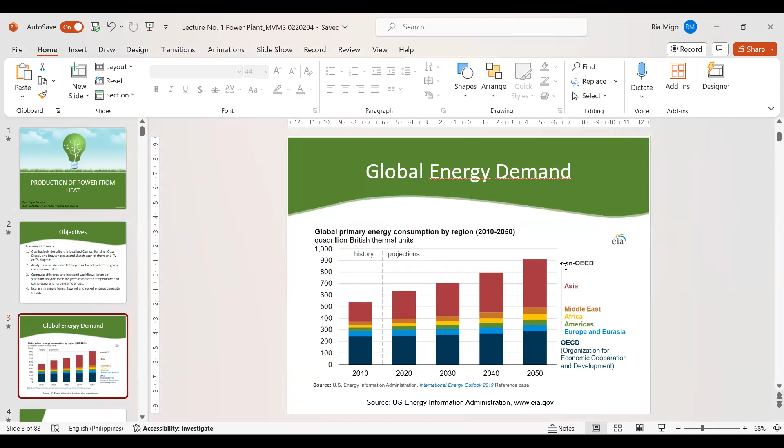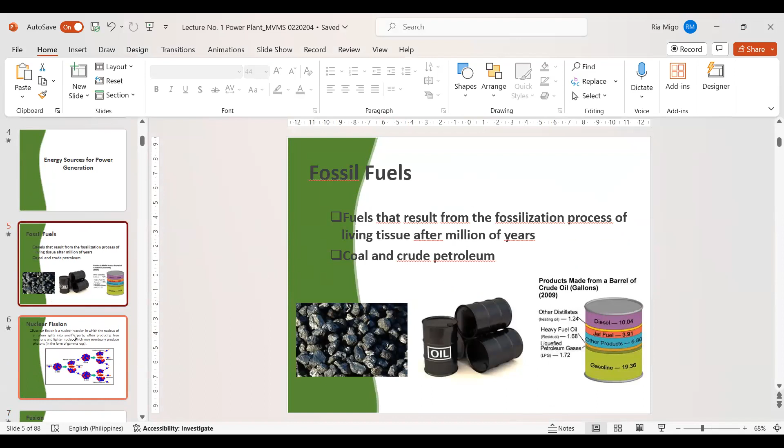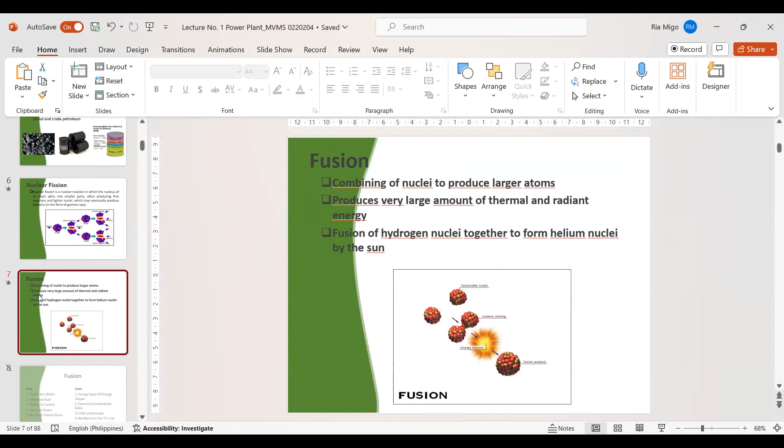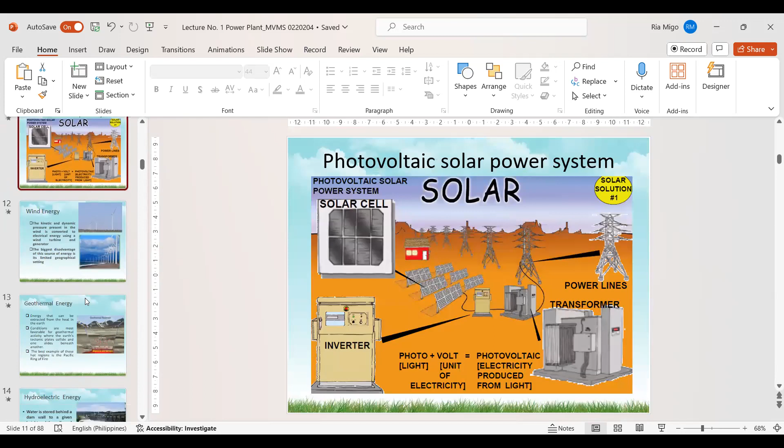Last time, before we started the discussion proper on the production of power from heat, I gave some general information. First, on the global energy demand, that it's increasing, so we need to increase the supply as well. But the problem is the energy source for power generation. We discussed the various energy sources, beginning with fossil fuels, but we know that they are not good because they are the cause of global warming. Then nuclear fusion—there's a big development on this technology, but it still remains expensive. Then we discussed renewable energy sources like solar, wind, geothermal, tidal, and biomass.

For biomass, we discussed that they can be converted to solid, liquid, and gaseous fuels.

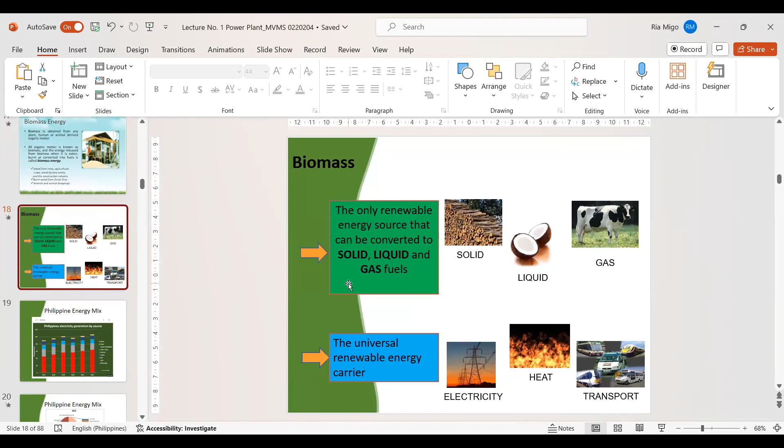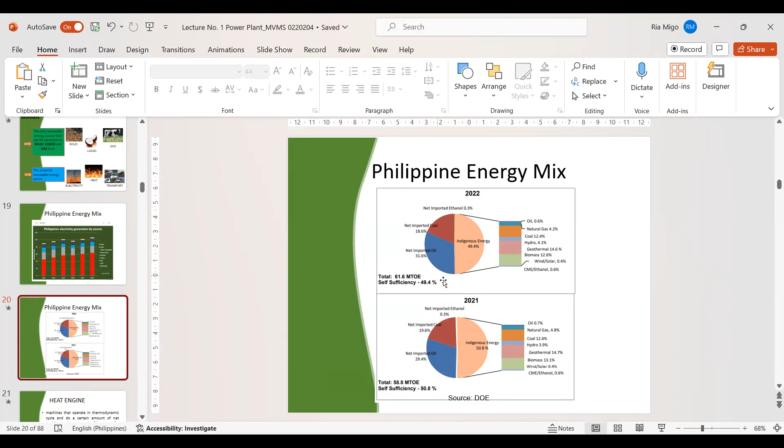We also touched on the Philippine energy mix, and based on the data, we are still very reliant on coal and oil, which are fossil fuels. Also, we are still importing almost 50% of our energy source. The rest we produce ourselves, but we still rely on imported energy source. So that's quite sad. We hope to be self-reliant in the future.

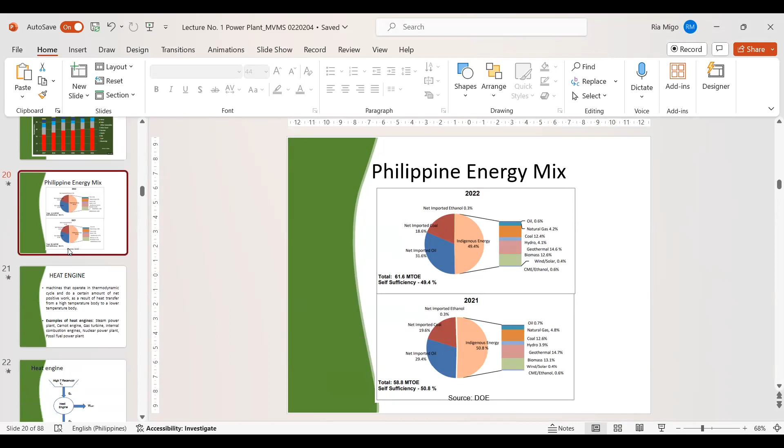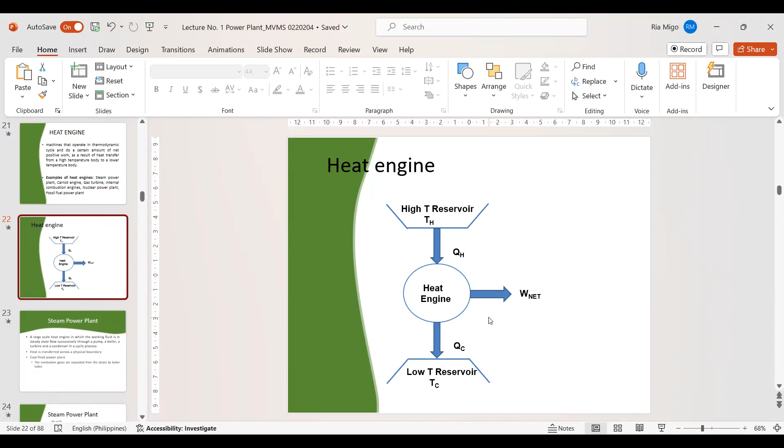Then we started the formal discussion on the heat engine, which is an engine that pumps heat from a high temperature reservoir to a low temperature reservoir, and in the process produces a net amount of work. For the steam power plant, this is a heat engine wherein the working fluid is in steady state flow through these devices in a cyclic process.

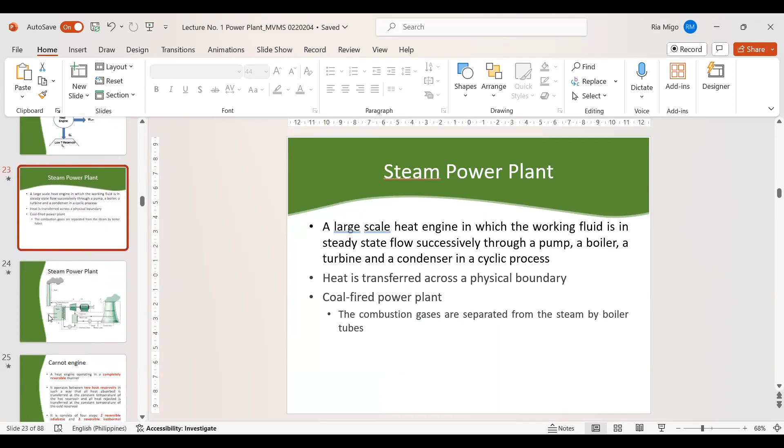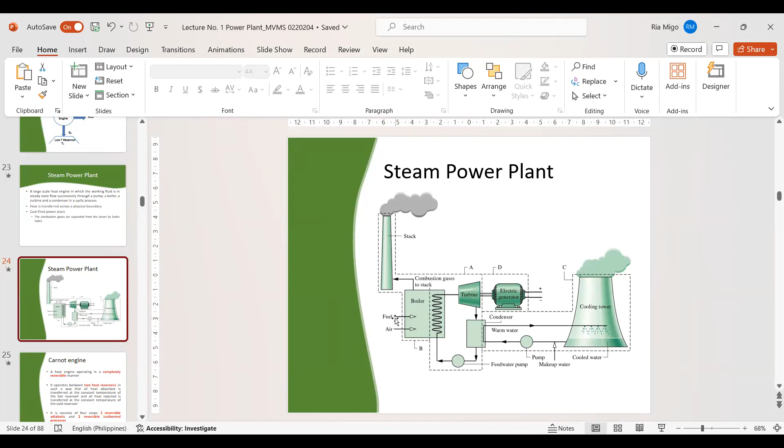So this is a diagram of a steam power plant with the basic components. We said that if we still want to use our power plants having this configuration, but we want it to be sustainable, then we must replace the fuel from fossil fuels to renewable sources of energy in the boiler. So we simply have to retrofit the power plant so that the fuel source is renewable and sustainable.

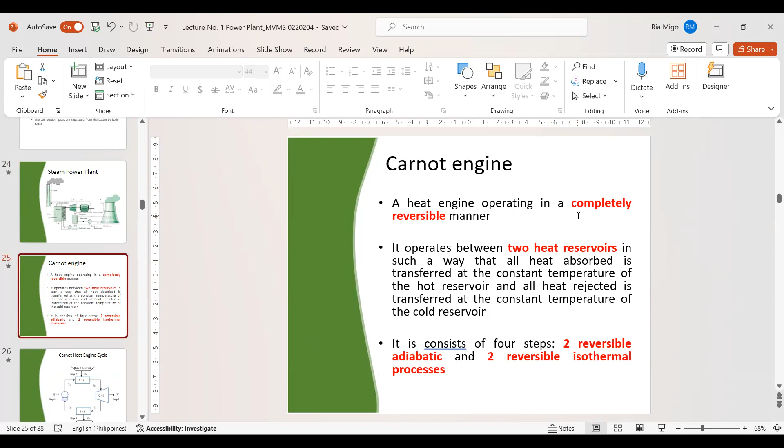Next, we discuss a Carnot engine, which is a heat engine operating in a completely reversible manner. So this is a Carnot engine. On the TS diagram, temperature-entropy diagram, we discuss the Carnot cycle, and as you can see, it's operating inside the saturated curve. All of the steps are reversible.

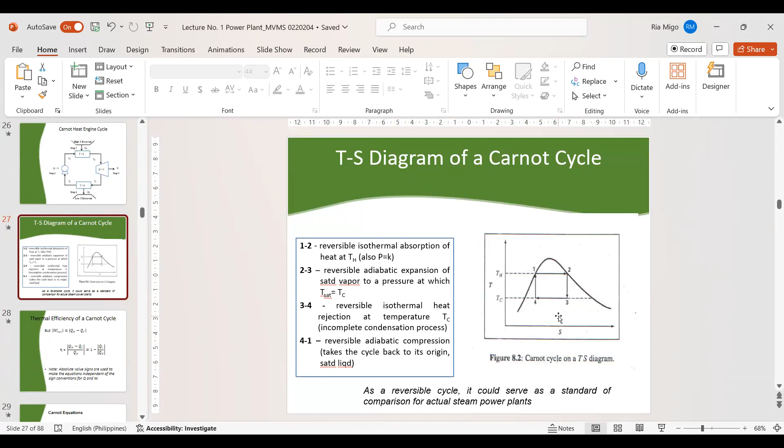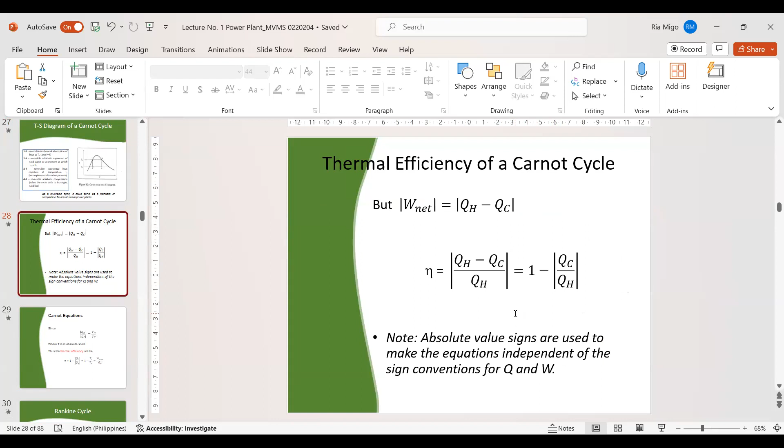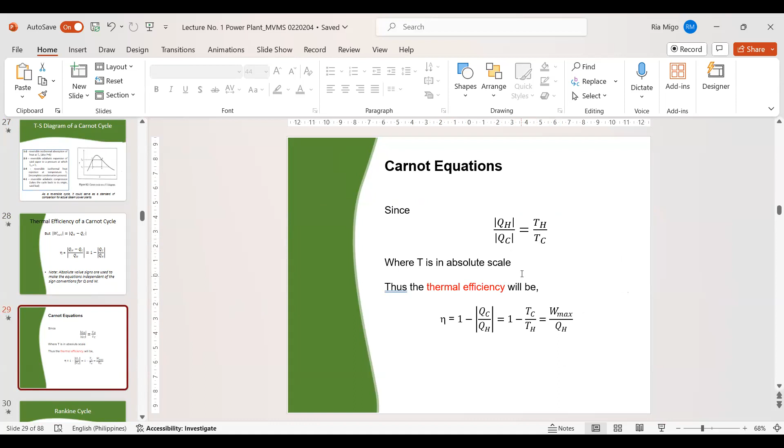So what is the use of a Carnot cycle? When we calculate the efficiency of a Carnot cycle, we can use it as the basis or the ideal efficiency of that engine. Remember, we cannot achieve that ideal efficiency—we can just approach it. It's the highest efficiency for that heat engine operating on that low temperature and high temperature.

So next we discuss the Rankine cycle, which addresses the practical difficulties in a Carnot cycle. For example, the practical difficulties are the severe erosion problems because of the high moisture content in the turbine, as well as the design of a pump that can take a mix of liquid and vapor. So this is a very difficult pump to design. That's why...

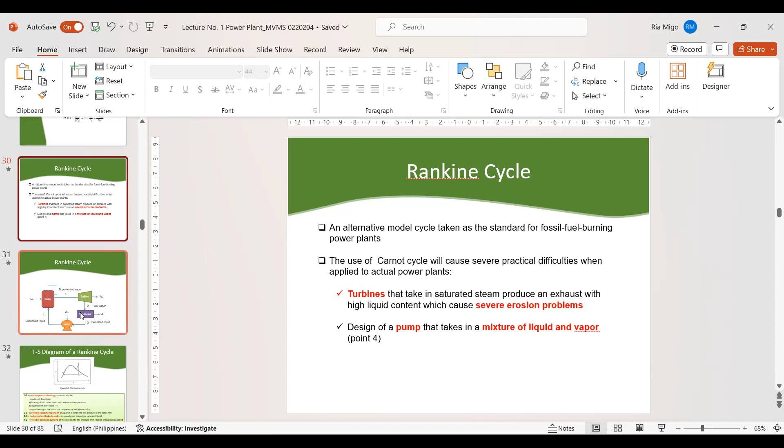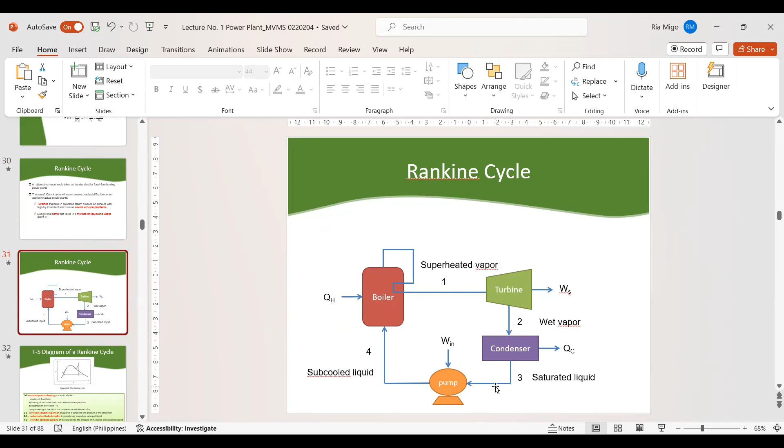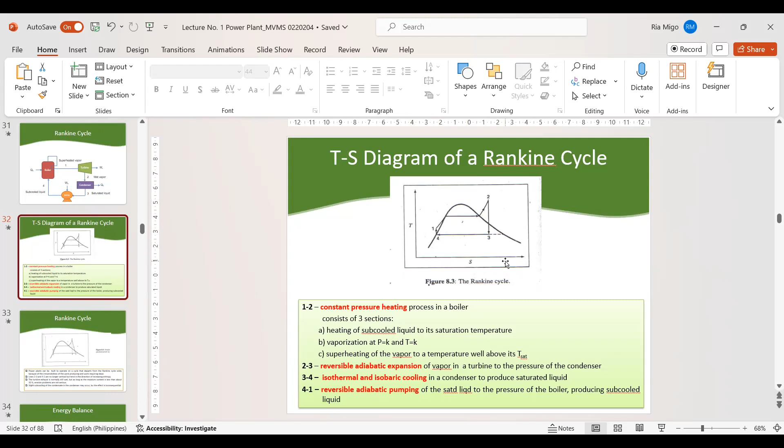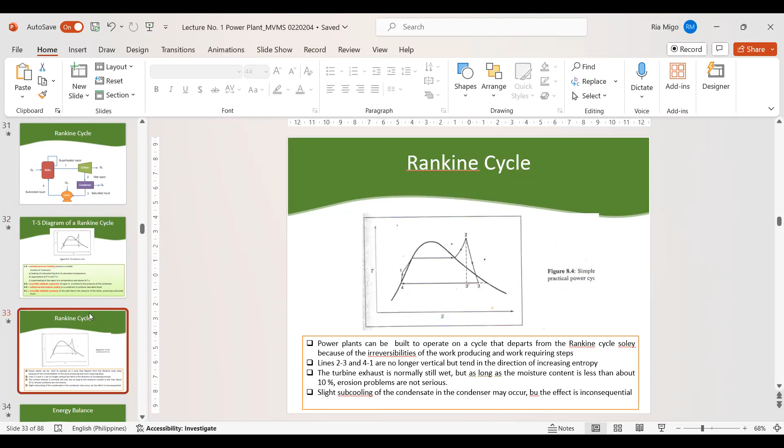In reality, it's not possible, so we are always going to a higher entropy state. That's why these lines are always leaning towards the right, towards higher entropy. It's not a straight vertical line, rather it's slanted to the right. So this is an actual Rankine cycle.

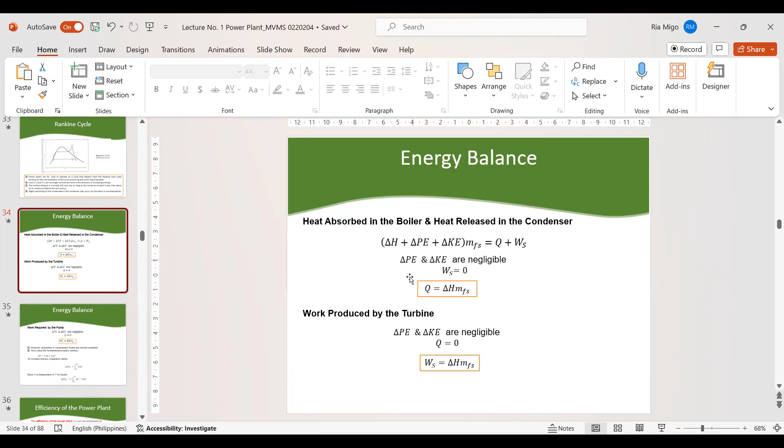Next, we did energy balances for all of the devices in the cycle, for the condenser and for the turbine. These are the energy balances for each device, and of course we have the energy balance for the pump. Then this is the boiler and condenser combined, and then the turbine, then the pump.

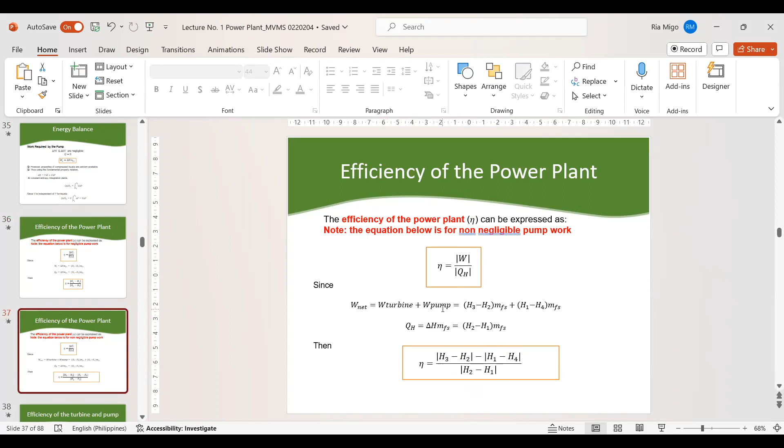Our next discussion is on the efficiency of the entire power plant. First, if there's negligible pump work, the efficiency is the net work produced by the cycle divided by the heat absorbed in the boiler. If there's no pump work, our equation simplifies to this one. However, if there's pump work, our equation becomes this one, because now we're considering the work required by the pump.

We also need the efficiencies of the turbine and the pump, which are calculated using these equations. For the turbine, since the ideal work done is always higher than the actual work, the ideal delta H, or change in enthalpy, is in the denominator, so this ratio is always less than 1. But for the pump, which requires work rather than producing it, its ideal work required is always smaller than its actual work required, so the smaller value is on the numerator.

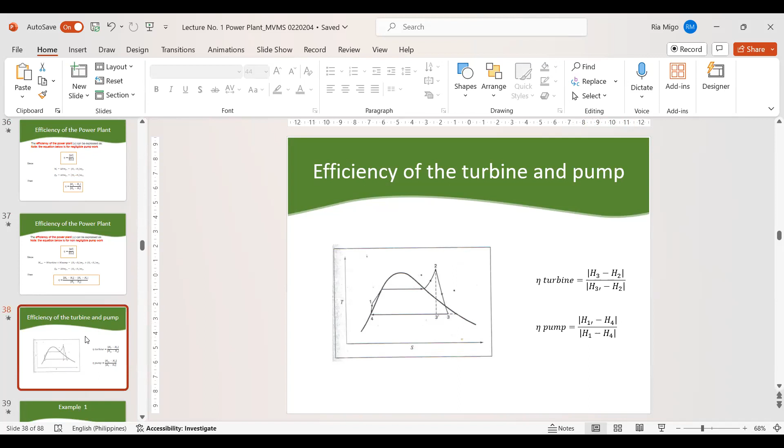Memorize that. Then we discussed a sample problem.

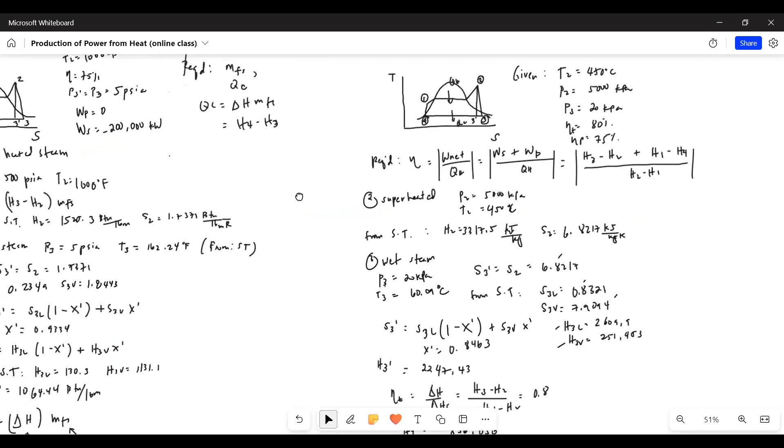Let me share the sample problem. Remember, this is example 1, sample problem 1. It's recommended that you first draw the cycle on the TS diagram to guide you on the state of each point. For this problem, we're given the superheated properties as well as the efficiency of the turbine, and it was said that pump work is negligible. We're also given the actual work by the turbine. We're required to find the mass of flowing steam and the heat released, or heat dumped, by the condenser.

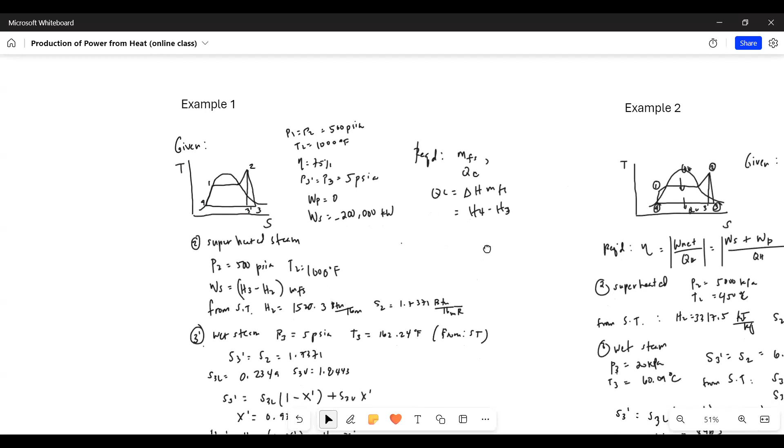So actually the first step, second to drawing the TS diagram and writing the given and required, is to do the energy balances. To get the mass of flowing steam, we can use the energy balance equation for the turbine. We're already given WS, the actual work done or produced by the turbine, but we don't know the change in enthalpy, so that's our goal, and we can do that by solving the enthalpies at each step.

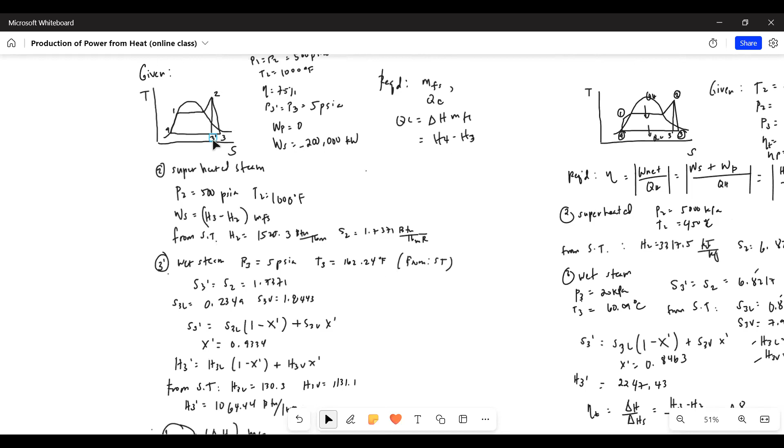So step by step, we solve the enthalpy. However, we're stuck with delta H actual, since we are able to calculate delta H ideal from the isentropic expansion of the turbine from point 2 to 3 prime. So we can make use of the efficiency of the turbine to calculate delta H actual. That's what we did, and from there we're able to calculate the mass of flowing stream.

Next, for QC, we simply use the energy balance equation around the condenser to calculate QC.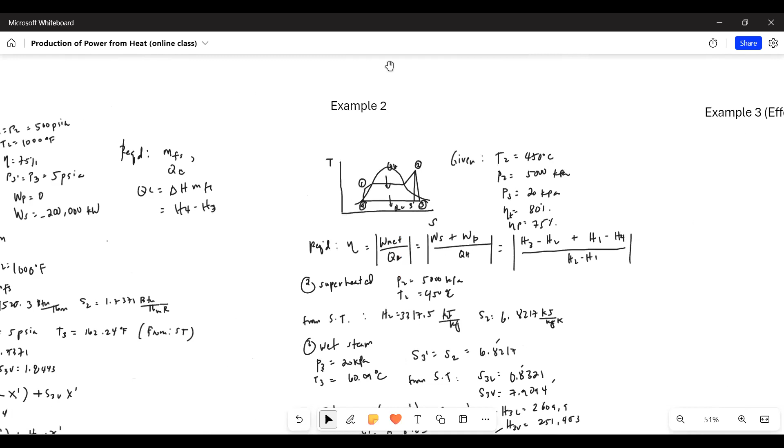For example 2, remember the next example is another Rankine cycle. We're given the superheated properties and exhaust properties, and we're also given the efficiency of both the turbine and the pump. So now the pump work is not negligible, because we're given its efficiency.

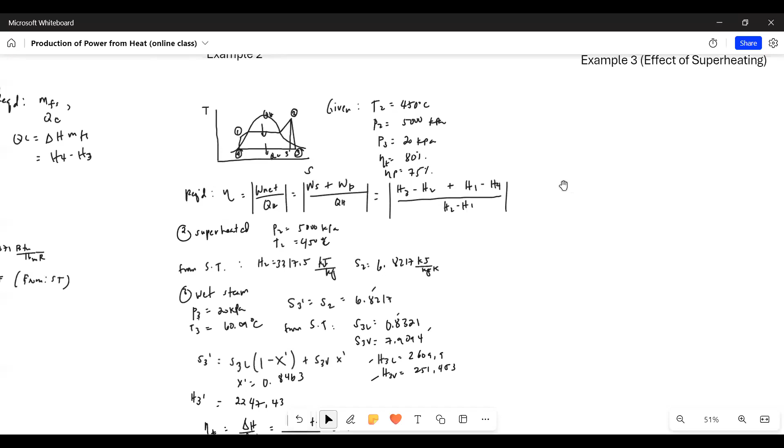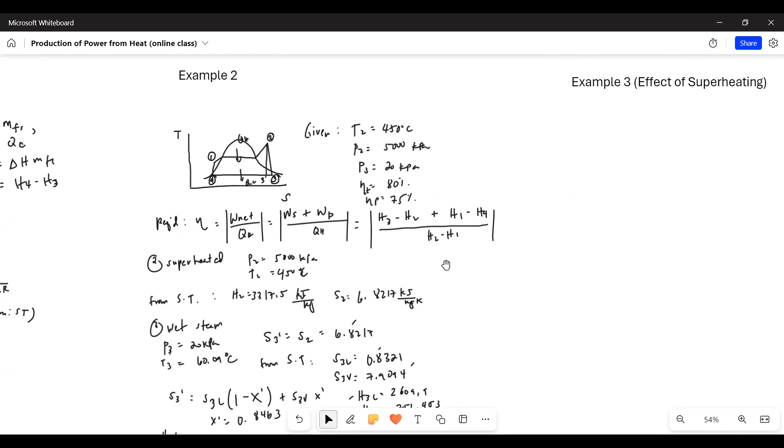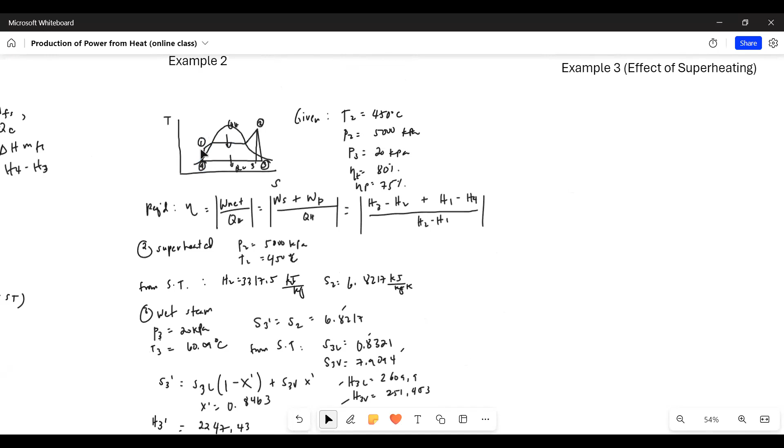We began the problem by drawing the TS diagram and then doing the equation. Since the efficiency of the entire cycle is required, we use the equation for efficiency, and we're able to solve the problem by calculating the enthalpy property at each point in the cycle.

After calculating the efficiency of the cycle, we compared the efficiency with that of a Carnot cycle operating at the same working pressures, and we're able to know that obviously the Carnot efficiency is higher. And we can interpret it as...

27.76% of the heat absorbed in the boiler is converted to work, and the rest is just waste heat released in the condenser. So as you can imagine, it's such an inefficient process. Current power plants are still really inefficient; there's a lot of waste heat.

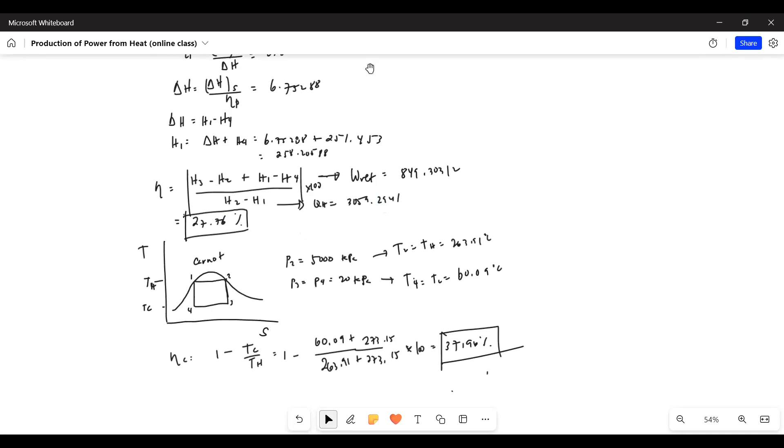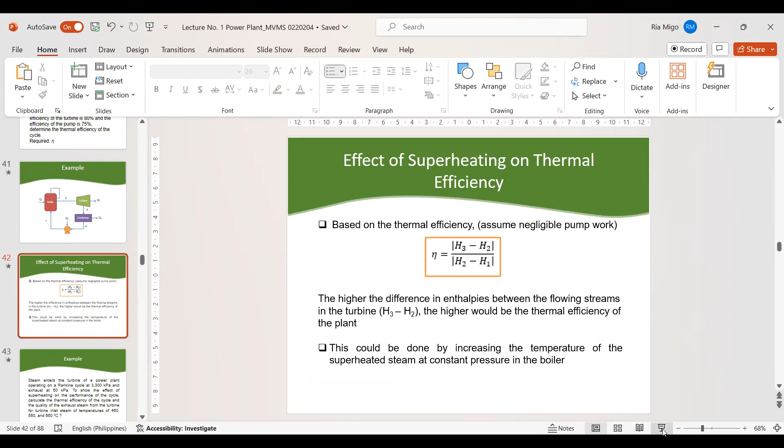So our goal is to increase the efficiency of our power plants, and we can do this by first superheating. Remember the efficiency of a Rankine cycle with negligible pump work - this is the equation for that, and this is the net work or work produced by the turbine, H3 minus H2. So to increase the efficiency, this numerator has to be increased, and we can do that by increasing the temperature of the superheated steam at constant pressure in the boiler, to increase the difference in the enthalpies.

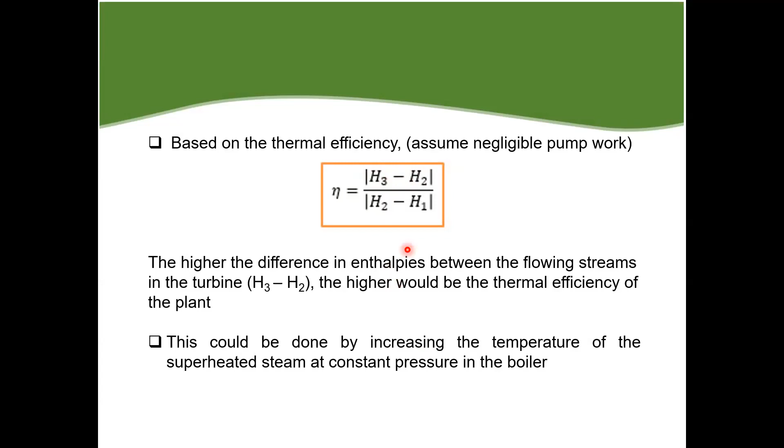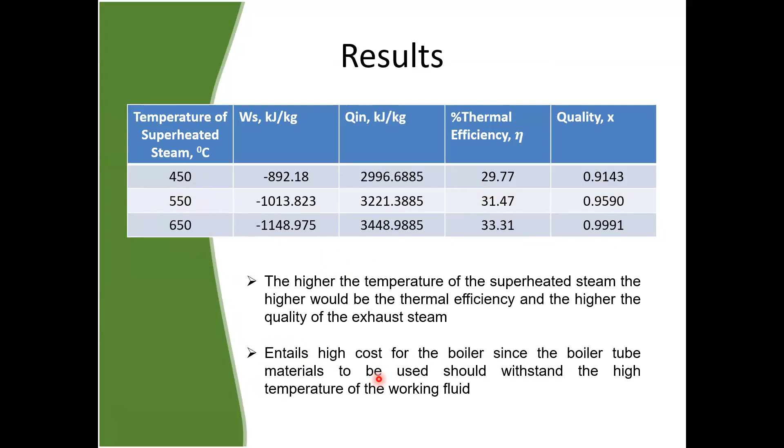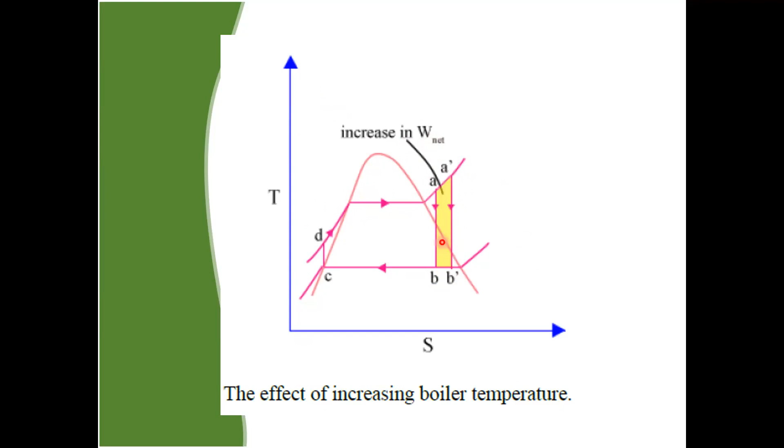So this is how an increase in the boiler temperature is portrayed on the TS diagram. From a low temperature to a higher temperature, as you can see, there's an increase in net work, which is this area right here.

Another way to increase the efficiency is by increasing the working pressure in the boiler. So still we have this equation for the efficiency - we have to increase the value of the numerator, and this can be done by increasing the working pressure. And as P increases, T also increases. We have a problem right here wherein we're being asked to solve for the thermal efficiency and the quality at different pressures.

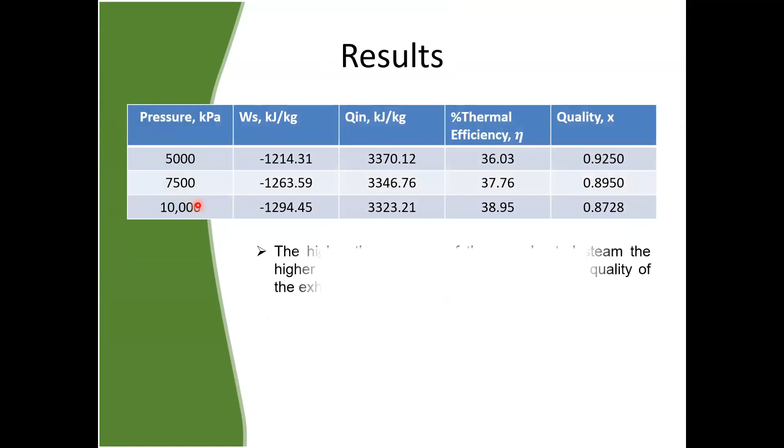So the result would be this one. The higher the pressure of the superheated steam, the higher the thermal efficiency, but the quality of the exhaust steam decreases. It entails high cost for the boiler since the boiler should be able to withstand the higher pressure of the working fluid. It may also cause erosion problems because of the low quality of the steam in the turbine.

So this is how the increase in boiler pressure can be portrayed on the TS diagram. As you can see, this is the lower boiler pressure. Increasing it to this level would result in a decrease in quality - we're nearer the saturated liquid curve and farther away from the saturated vapor curve.

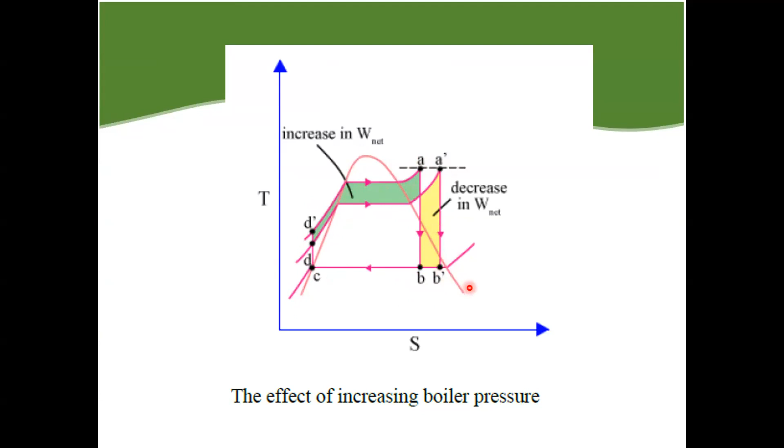So we want to increase the efficiency of the cycle, but as the pressure in the boiler increases, T increases also to unsafe levels, and it entails higher costs for the boiler and superheater to withstand the pressure and temperature increase. Also, if we increase the boiler pressure, the quality of the exhaust steam decreases - it increases the thermal efficiency but increases the moisture content that will cause erosion problems. Therefore, practical or actual power plants seldom operate beyond 10,000 kilopascals and 600 degrees Celsius.

Another type of Rankine cycle is the Rankine cycle with superheat and reheat. It modifies the basic Rankine cycle by reheating the partially expanded steam. After partial expansion, the steam is withdrawn from the turbine and reheated at constant pressure. It's a practical solution to solve the excessive moisture problem in the turbine, and it's commonly used in modern steam power plants. Therefore, the turbine is made up of two stages, a high pressure and a low pressure stage.

So this is how the superheat with reheat looks like. The superheated vapor enters the turbine at a lower pressure, and then it exits the turbine to be reheated in the boiler and enters the turbine again. So the turbine is divided into a high pressure stage and a low pressure stage. For the rest of the steps, it just follows the basic setup of a Rankine cycle.

So, okay, so it's reversed. This is the high pressure stage, and this is the low pressure stage. The high pressure stage comes first. See, this is the higher pressure, and then it exits the turbine to go back to the boiler for reheating, and this is the lower pressure stage. It's lower pressure here, higher pressure there. Remember that, so there's a correction.

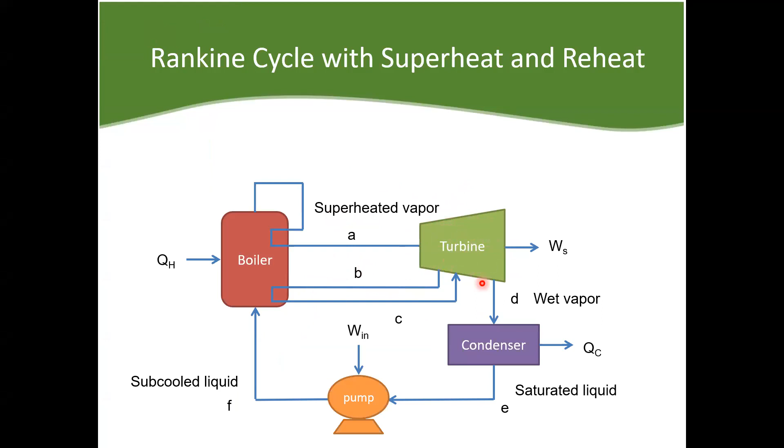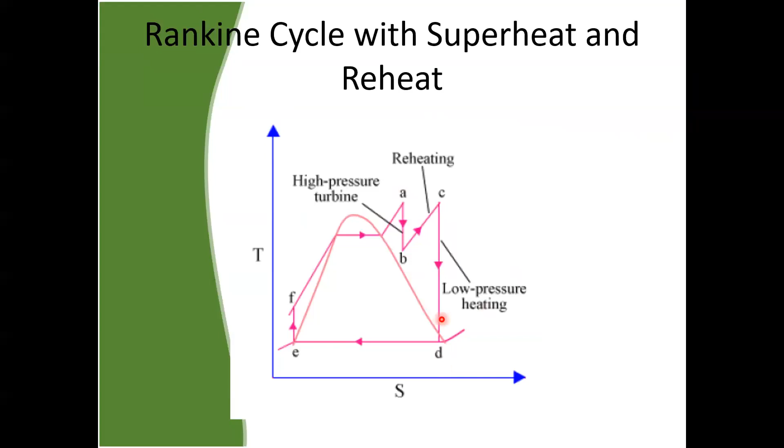The first stage is the higher pressure stage, and the second stage is the lower pressure stage. So it exits at the high pressure stage and goes to the boiler, and then is reheated, and then it exits the lower pressure stage.

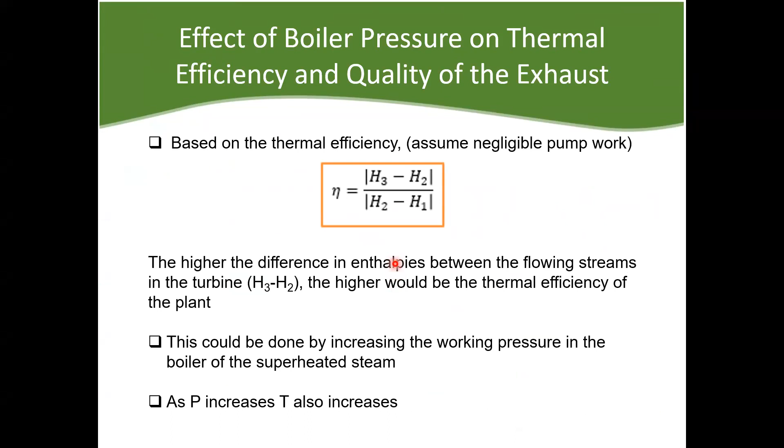Okay, so we have an example. But before that, for the seatwork, I would like to go back to the problem earlier, on the effect of superheating on the efficiency. So what we'll do is I will demonstrate one temperature, and you will solve the rest by group or by pair. Okay, so let's answer this problem first.

So we're given the operating pressures. This is the inlet pressure at the turbine, and this is the outlet pressure, and this is the inlet temperature. So we're asked for the thermal efficiency. Okay, so let's solve the problem.

Okay, effect of superheating. So let's draw the TS diagram first. Imagine this is just a straight horizontal line right there. Okay, so this is point 1, point 2, point 3, point 4.

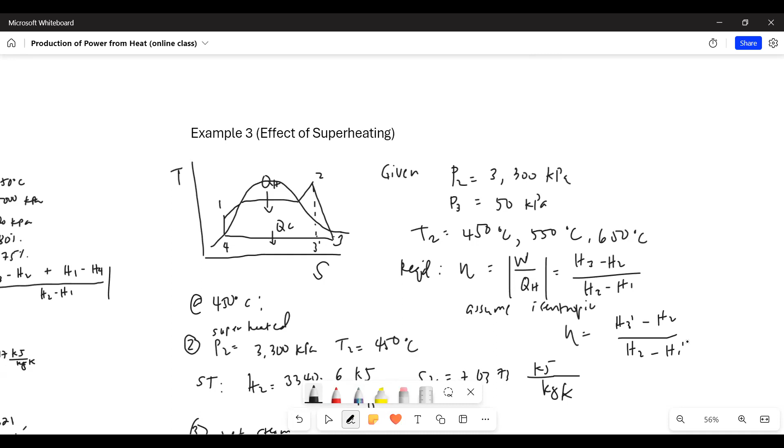So we can calculate for H3 prime given from the steam table. From the steam table, H3L is 340.564 and H3V is 2646. So H3 prime, we simply use X prime for this one to calculate H3 prime. Plugging in these values, H3 prime is 2448.4064 kilojoules per kilogram.

Next, at point 4, saturated liquid. What are the conditions? P4 is equal to P3, since this is an isobar. So P4 equal to P3 is 50 kilopascals, given. So from the steam table, H4 is 340.564, the same as before because it's the same pressure and we're on the saturated liquid curve. And V4 is 1.030 cm cube per gram.

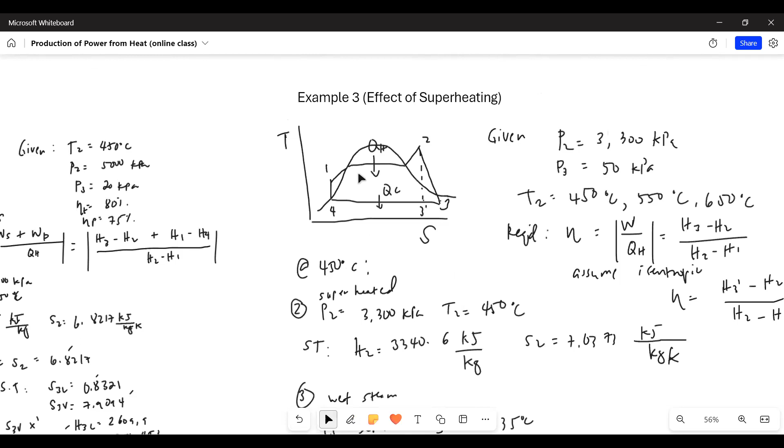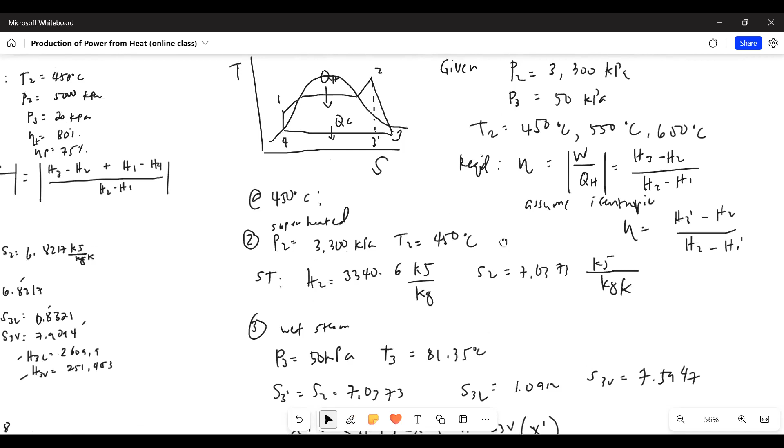Next, we check. So now we have H4. Let's go to point 1, subcooled liquid, which is outside the saturation curve. What is P1? Remember, this is an isobar, so P1 equal to P2, and P2 equal to 3300 kilopascals.

So we make use of the work of the pump. The equation is isentropic work, from energy balance: P1 minus P4 times V4. Plugging in the values, we know P1, we know P4: 0.001030 meter cube per kilogram times 3300 minus 50 kilopascals, which gives kilonewton meters per kilogram, or kilojoules per kilogram. And it's 3.3475 kilojoules per kilogram.

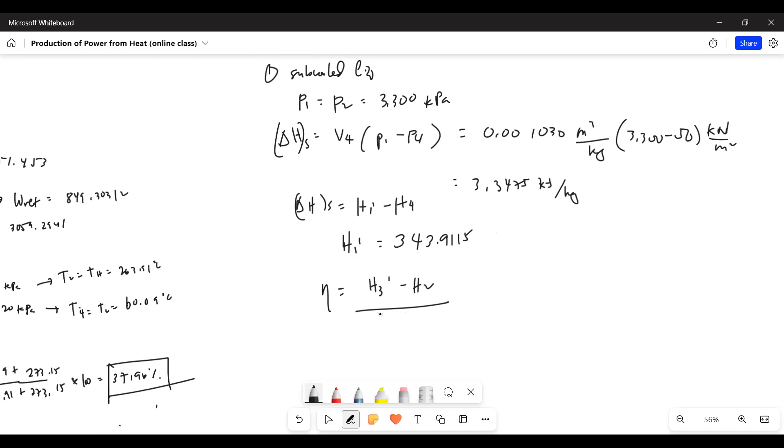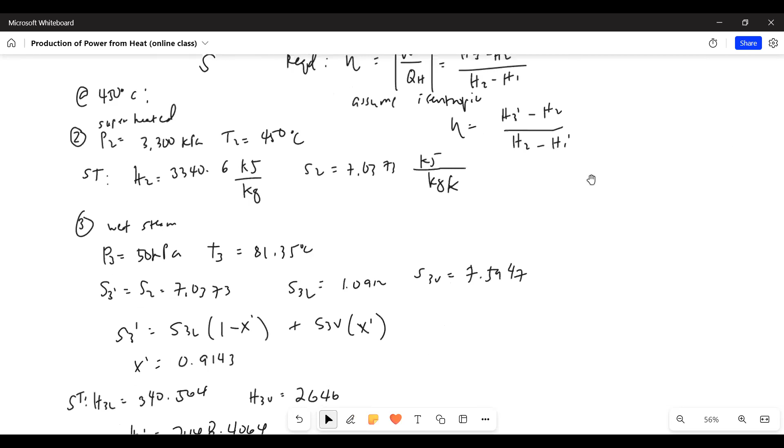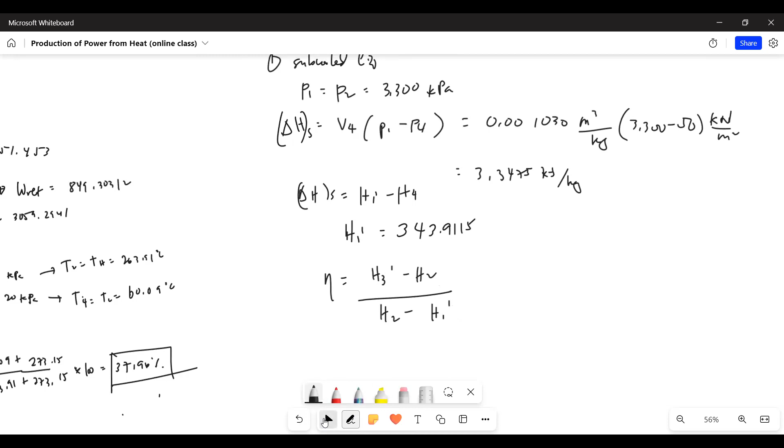Now that we have all the information we need for the efficiency, which is H3 prime minus H2, divided by H2 minus H1 prime. This is for the turbine, the numerator, H3 prime minus H2. For the boiler, it's H2 minus H1 prime.

So substituting the values that we calculated for efficiency, and multiplying by 100%, the efficiency is 29.77%.

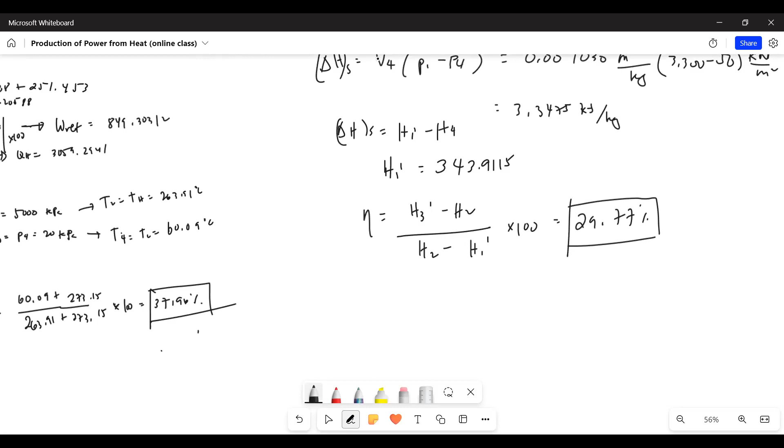Let's go back to the problem. So the quality, we're able to solve the quality, 0.9143. And we also have to calculate the work shaft and Q in. Q in here is just QH.

So what is the work shaft? Remember, work shaft is just the numerator. This is the work shaft, and this is QH or Q in equivalent.

So just plug in the values, H3 prime minus H2, and we will get for work shaft, negative 892.1936. For QH, it's positive 2996.6885 kilojoules per kilogram. So let's see, yep, these are the values.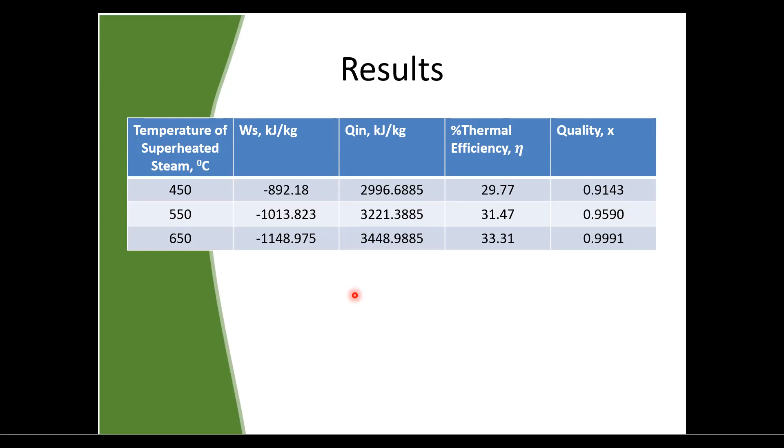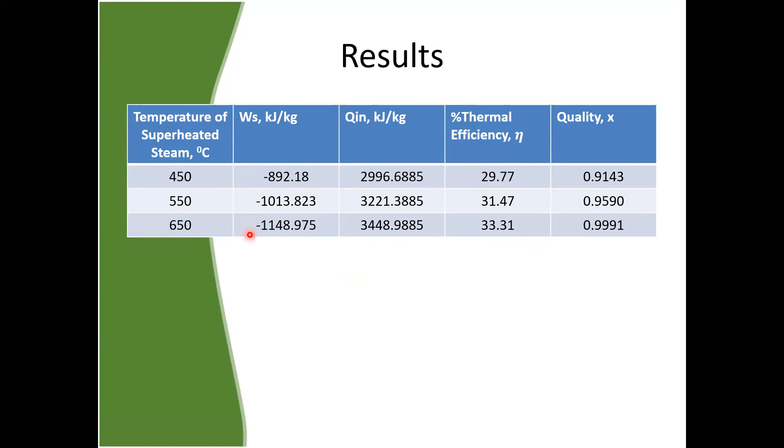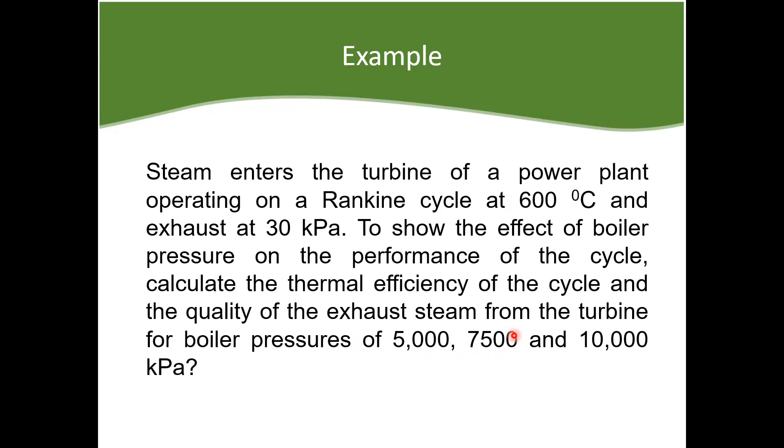Now it's your turn to solve for 550 degrees Celsius, 650 degrees Celsius, and for the other groups, it's your turn to solve the next problem: 5,000, 5,000, 7,500, and 10,000. So now I will give you time to solve, to do the solution to complete this table.